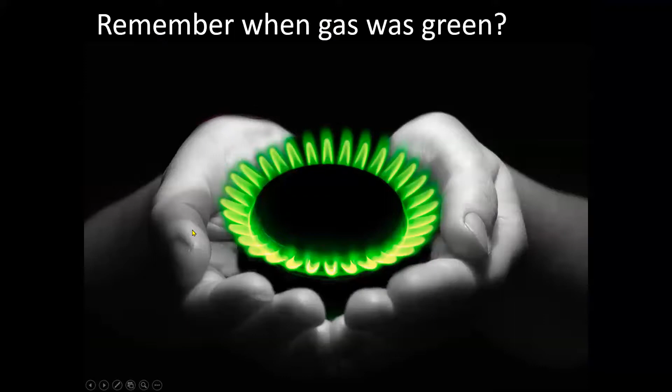All right, so let's get into it. So remember when gas was green and air cons were bad? That's pretty much how it started back in 2001 when I started Positive Footprints. And it was all down to the fact, well, air cons were bad because they were very energy inefficient then, high energy users.

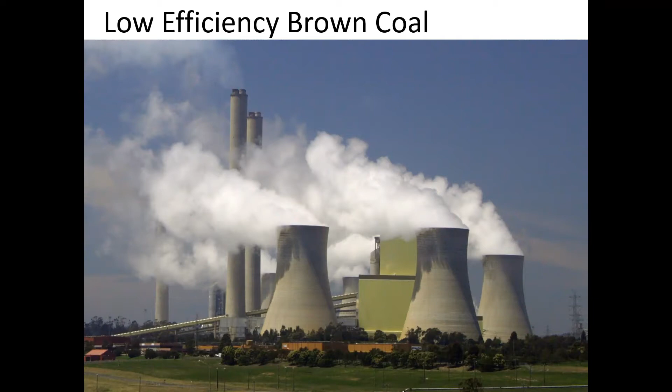But gas was good in the sense that it was better than coal. In Victoria, we have brown coal, which is worse than black coal. It's less energy dense, so you get less energy out of it in the first place. We also have the issue that it's in the Latrobe Valley primarily, and there's a long way to transmit the electricity, and you lose around about 70% of that electricity or thereabouts just getting it to your home. So it's very energy inefficient.

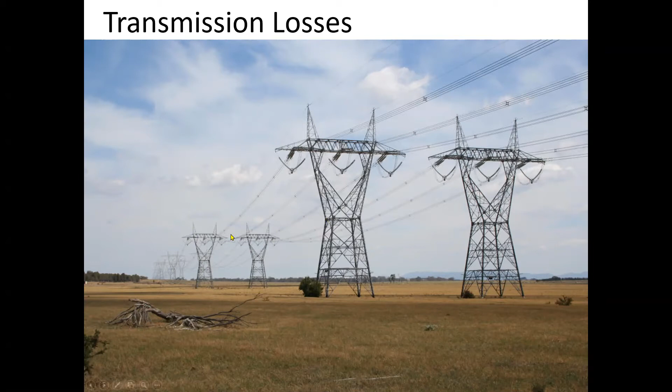And in Victoria, we have the dubious distinction of being the state with the highest carbon intensity for our homes, at 8.8 tonnes per year from the electricity and gas that we use. So electricity was bad, and of course hence gas was better. And the reason gas was better is because it didn't have the transmission losses. You brought it to your home and you burnt it at source.

And so we put it into our gas furnaces, our hydronic systems, our gas boosters for the solar hot water, gas cooktop, gas oven. If it could be gas, we'd pretty much make it gas. So what changed?

So what changed for me, first of all, was the sustainability of it with the idea of fugitive emissions. This came around, came to prominence around about 10 years ago. And it's simply the recognition that actually there are transmission losses in the gas network. And the transmission losses are not in the form of carbon dioxide, but in the form of methane. And methane is the main ingredient of the natural gas that we burn.

There's transmission losses all the way through the system, from when you drill down into the sedimentary rock to get at the gas, which can often come up at high pressure, and it's hard to maintain a complete seal. Then in processing the gas, then in bringing it through the pipes and all the joins in the pipes, getting it to your gas meter. Gas meters can leak - I've often gone past gas meters and smelt that gas smell. And then there's incomplete combustion within the home.

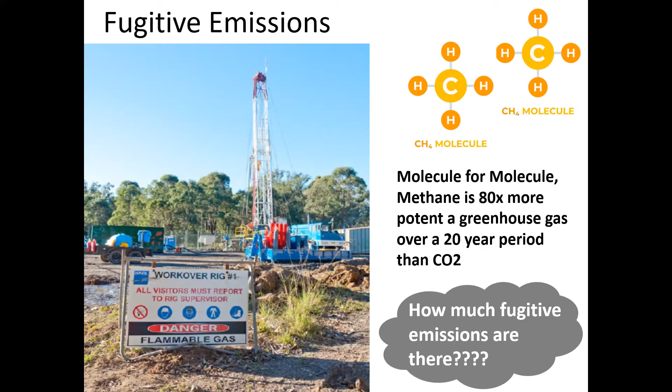Unconventional gas is now being pushed, and the reason that's being pushed is we sell a lot of gas overseas. In fact, we're the biggest exporter of gas in the world, second only to iron ore of our exports. So it's a huge industry, and we're actually now starting to run out of what they call conventional - that's easy supplies of gas.

Now we're looking at unconventional gas, which is more difficult to get. This one, coal seam gas, requires more drill heads to be put in - hundreds, potentially thousands over an area when they're getting the gas out. And to my mind, not only does that look like a more expensive way potentially to get gas, but also the opportunities for fugitive emissions probably will rise. Sounds logical.

At the same time as this idea of fugitive emissions making gas not so green came out, there's also a rise in gas prices, pretty much because we deregulated the gas industry and started selling overseas. Overseas there's a lot of demand, so the price for gas domestically competes with that demand, and the price goes up.

This is a really interesting little page here I found and wanted to show you. Of the gas exported, 72% of our gas gets exported, this big round ball here. But you look down, the gas we use in our homes is only 3%, and manufacturing is only 6.6%. So the vast majority goes overseas.

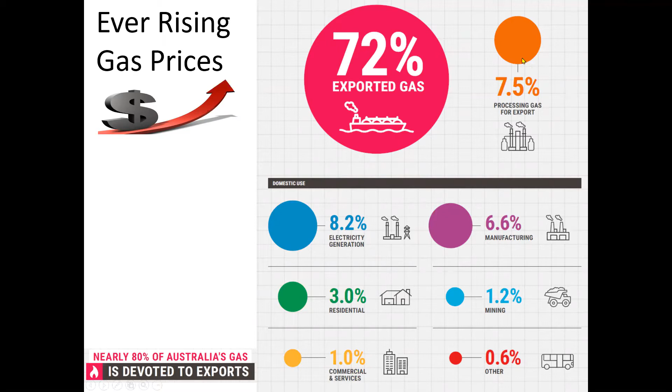It's a little bit sad for me that since 2005, we've started as a country putting in a lot of wind farms, solar farms, and a hell of a lot of rooftop solar, and I've been pushing that. The electricity grid has responded and become more green, in the order of about 15 million tons of carbon dioxide less intensive than it was in 2005. But that gain in carbon efficiency has been completely offset by the fact that we're now burning a whole lot of gas to send overseas.

So anyway, those are the issues with gas. At the same time, the technology has moved on, and air conditioners, which used to be the big bugbear of the sustainability movement—you wouldn't want to call yourself a sustainable builder and have air conditioners in your home—are now the darling, because they now have inverter technology and are much more efficient. In fact, they're so efficient they can be more than 100% efficient—200, 300, 400, 500, and the most efficient are 600% efficient.

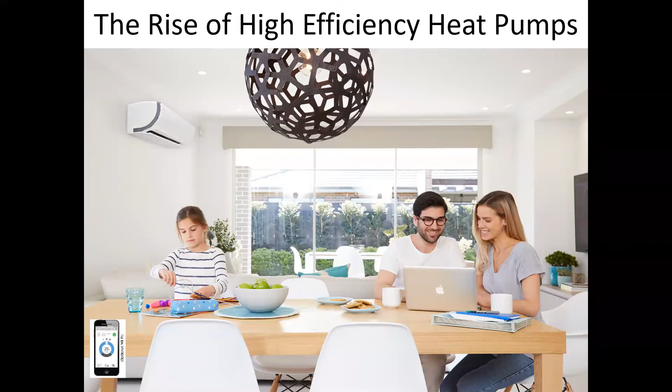What do I mean by that? I'll give you a little section of what an air conditioner looks like. There's different words for this—some people call them split systems, air conditioners, they're a type of heat pump. All of those words mean the same thing.

But the reason they can be so efficient: if you think about a gas burner trying to produce hot air for a home, the most efficient it can ever be is 100%. If all of the burning turns into heat, all that heat gets ducted into the house and none escapes out the ductwork, that's 100% efficient, because it's making heat. But these heat pumps aren't actually making heat.

They're just running a transport network from the outside to the inside around this sort of loop, running a refrigerant to do that. As they're running, the refrigerant gets very cold on the outside. In heating mode, it gets very cold, runs through these pipes, maybe minus 40. They blow air across it, and the air transfers heat into the refrigerant. Now that air might only be 5 degrees, but compared to minus 40, it's still very warm. The refrigerant goes up to the indoor unit, gets compressed, that heat comes out and goes into your room, and it just runs round and round.

In cooling mode, it runs the opposite way and grabs heat from the inside and shifts it outside. In doing that, a system like this might use, say, 1 kilowatt hour of energy to circulate. But in doing that 1 kilowatt hour of energy circulating, it might be able to transport 3 kilowatt hours of heat, or 4 kilowatt hours, or the best are up to 6 kilowatt hours of heat.

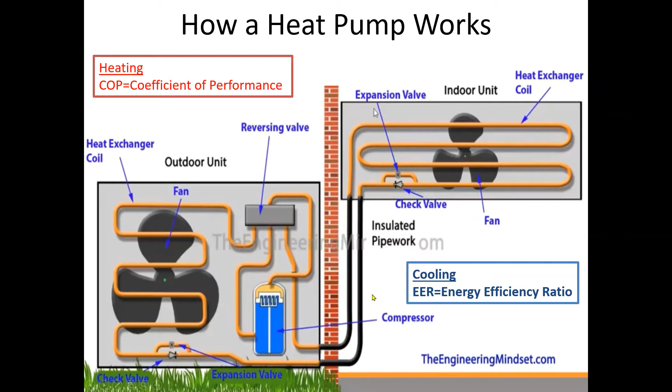It has a coefficient of performance of around 4.5, meaning for every kilowatt hour of energy you use, it shifts 4.5 kilowatt hours of heat into the tank. So heat pumps are sort of like the LEDs for the heating and cooling world, that sort of factor of improvement over what we had.

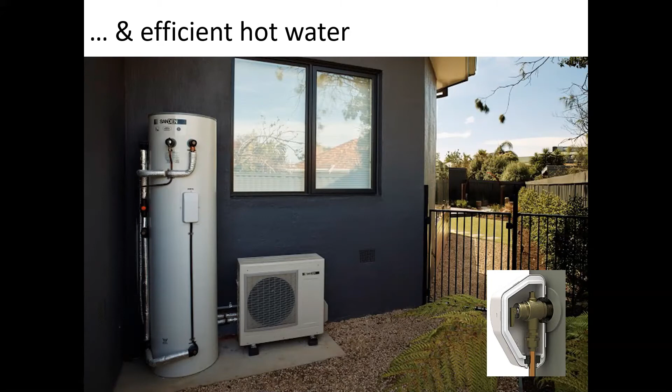At the same time, another piece of technology that works very well with going all electric is the fall in PV prices. My first PV system was a 1.5 kilowatt system back in 1998 when I lived in South Australia. It was 8,000 dollars after government rebate for 1.5 kilowatts. These days, well, here's one I just pulled off the internet, so you can get very, very cheap prices for large systems.

And what do you do with that energy? In the middle of the day, if you're all electric, you can put it into your hot water and heat the tank, or put it into heating up your home. And if you've insulated your home well, when the sun goes down you can turn it off and the house should maintain its heat well into the night.

Same in summer, you'll be making heaps of power, and you can use it to run those air conditioners. Again, once the sun goes down, turn it off and retain that coolness if your house has been designed well. We'll talk about retrofits in a minute.

So what sort of outcomes can you get? This is a house we built a few years ago. We've looked at the energy data. It's a new home, 8.1 star, so it's a well-designed house, I believe. It's got a 4.8 kilowatt system, and there are 3 adults living in this house. Most of the time they're working from home, and they average 0.6 kilowatt hours a day from the grid.

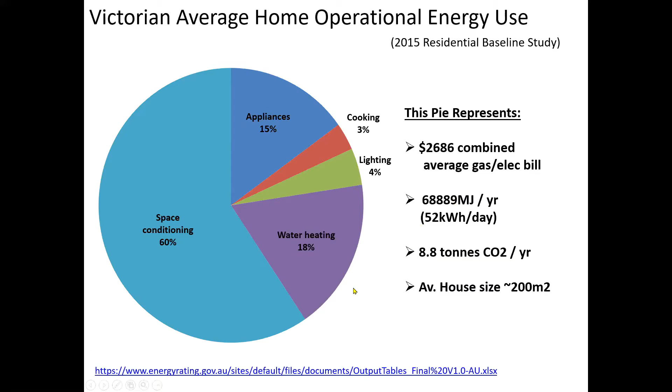So I've come up with this thing called a roadmap to carbon zero homes, and this is just a useful device to show where the big low-hanging fruit are to grab, and what the effect of implementing different strategies is on the improvement to the pie graph versus the average house.

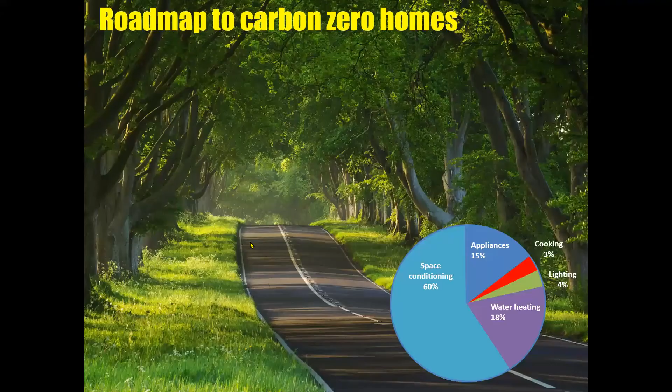So when you're looking at space conditioning, whether you're doing a new house, a renovation, or retrofit, there are three things that affect the performance or the amount of energy that goes into space conditioning.

One is house design. Obviously, in a retrofit, you don't have the benefit of mucking around with that too much. The next one is building to make sure that the house performs as it was designed to perform. And the last one is the energy efficiency of the heating and cooling that you put in.

So my first tip is, if you're doing a new home or renovation, what you should be doing is aiming for what they call a NatHERS rating, or a house energy rating of 7+. New homes have to have an energy rating, and the minimum is 6.

Just on that scale, a 0-star house would be like a tent. A 10-star house is a house that theoretically needs no mechanical heating and cooling. I would say don't go for the minimum, go a little bit higher, try to get to 7. It just makes it very easy to have a really good performance for the whole house as we try and minimize the wedges of those pies.

The other thing I would say is this little guy down here called TPA, Thermal Performance Assessor. This is someone who does the rating. I'd get them involved at the design stage, and this is what we do when we do our designs.

But 99% of the industry don't do it. They'll use it as a compliance tool just before you get the building permit. Unfortunately, at that stage, there's very little that a house energy rater can actually do to improve the design.

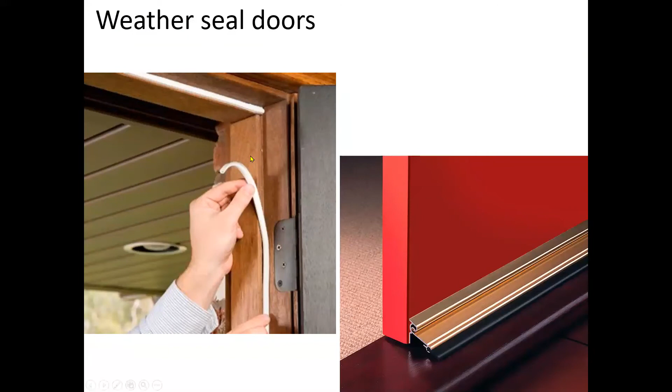A lot of homes have internal vents on the room walls. We no longer need those. They were put in back when gas heaters weren't flued to the outside, to stop methane poisoning from unburnt gas. These days heaters are flued to the outside, so on most homes you should be able to close those up and stop air leakage. If you're not sure, ask a builder or plumber first.

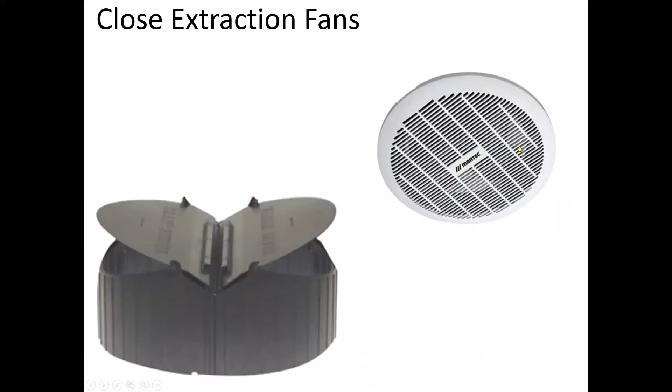Extraction fans are another thing to look out for, very common in bathrooms. They're just holes through to your roof, so in winter your hot air rises up to the colder attic space, and in summer you might get hot air coming down when you don't want it. Just put one of these over the top, and it closes off when not in use, then opens when the air's blowing.

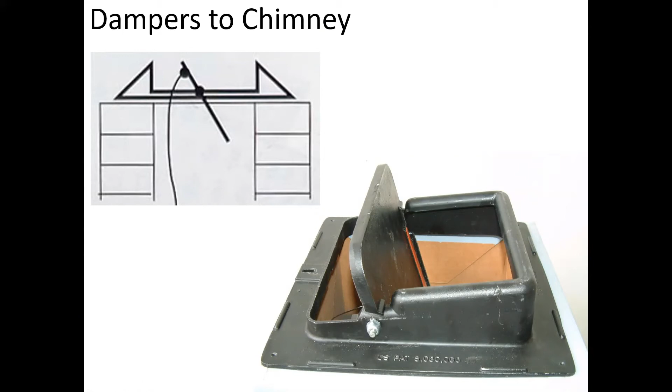And of course you've got chimneys. You can put dampers on, or seal up the throat of the chimney as well. It really depends on the house what you do, but the point is: find your gaps and cracks and seal those as a first instance, even before we talk about getting off gas.

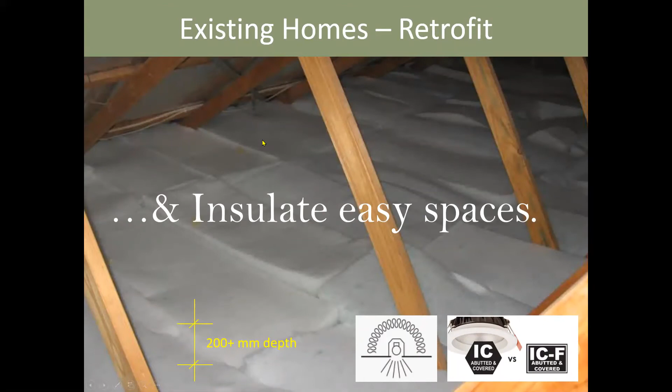The other thing to look at for an existing home is insulating easy spaces. You might not want to re-insulate your walls—that can be difficult—but ceilings definitely. Go up into your ceiling and measure the depth of insulation you've got. If you've got less than 200 millimeters of depth, I'd be putting another layer over the top. 200 mil is equivalent to an R3.5 batt, which would probably be my minimum recommendation.

One thing to note from a safety point of view: before you cover over like this, if you've got downlights going into your roof space, they can only be covered if the lights themselves are rated IC or ICF, abutted and covered, or have a symbol showing that. Otherwise, by law, the insulation needs to be pulled back so the light globes don't overheat and cause a fire in your roof space. So be sure you've got the right sort of downlights. If you have pendants hanging down instead, everything should be fine. And if you're building a new home, just try to avoid downlights to begin with.

You can insulate under the subfloor as well, as long as you've got enough height—400 millimeters really needed for someone to even consider going under there. It's not an easy task lying on your back putting on underfloor insulation rolls. Again, I'd suggest an R2.5 roll to go under there.

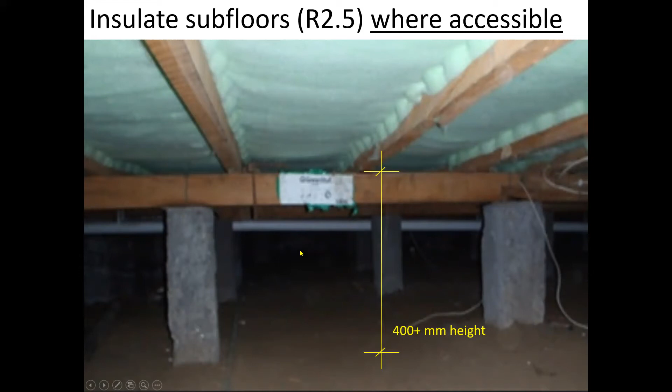Now, wall insulation—I think it's worthwhile doing, but I would only do it if your weatherboards or cladding are failing or rotting and need replacing, or as part of a renovation process. And when you're doing it, change over your windows at the same time, since it makes sense to do that together.

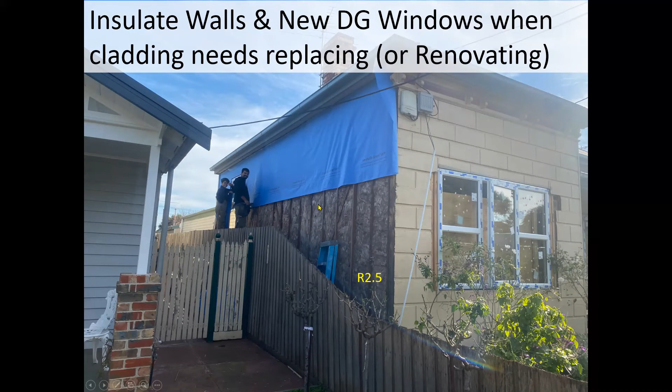Assuming you do some of those things, it's very unlikely as a retrofit you'll be able to do all of them. You might find your house has improved a little, you've made a bit of a dent, but it's probably not going to be at new house standard unless you're able to do a number of those items.

But don't despair, because you can still do a lot with technology these days. The next thing to look at, for an existing house, is to change over your heating system to an aircon system, now that you've insulated what you can and made your house reasonably tight, or at least got rid of the main offenders. If you're doing a new house, just use these from the beginning. I'd be specifying a coefficient of performance greater than 3—typically most of the ones we put in are 4+.

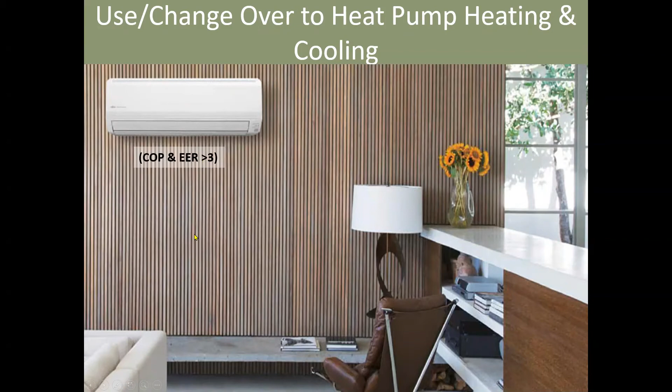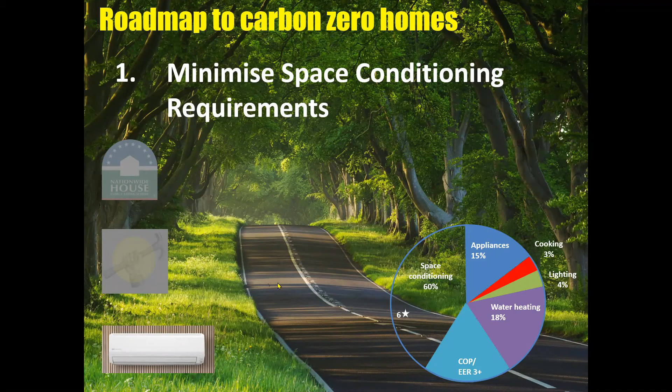If you've got a coefficient of performance of 3, effectively you can provide the heating and cooling you need with 1/3 of the power. So you made a significant cutout from the average house compared to what your house is now. And if you're building a new home, that wedge would probably already be smaller, because you would have already cut off more in the original design and construction.

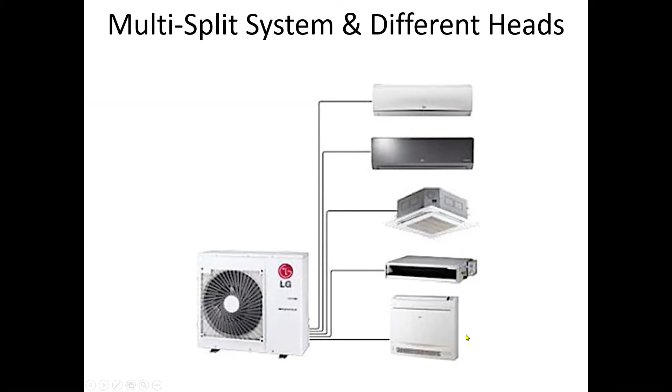Split systems can also come as multi-splits, where you've got one compressor to a number of heads. They don't have to be the ones up on the wall - they can be roof cassettes, they can be built into bulkheads so it just looks like a grill, more like a ducted system would look, or they can be radiator panels.

You can put them in as ducting through the roof, like more like a standard system. However, it will not be as energy efficient, just like any ducted system has reasonable inefficiencies because it's going through a cold roof space and you lose a lot of heat into your roof, even with insulated ductwork.

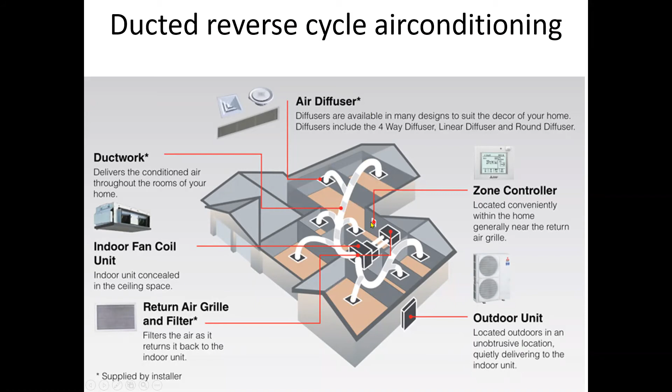So what do you look for when you're buying an air conditioner? The main thing you should be looking for is this COP, EER - energy efficiency ratio, coefficient of performance. I'm looking at this set here - that'd be the number for the indoor unit and the outdoor unit that goes on the outside. This one is the best on the market with a coefficient of performance of 5.81.

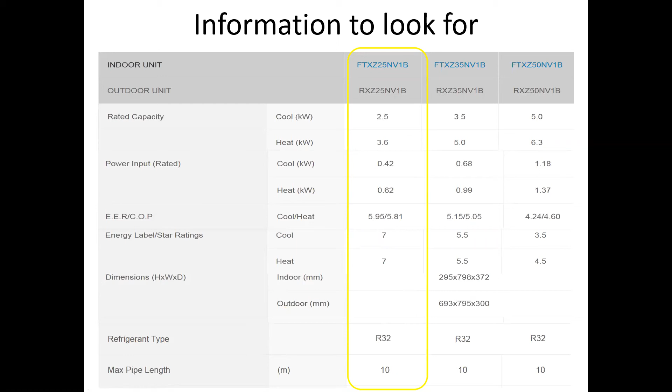That means for every kilowatt hour that I run it, I transfer 5.81 kilowatt hours of heat, or cool if it's in cooling mode - actually cooling is a bit better, it's 5.95 for cooling. The other thing that I think is really important to look at is the refrigerant type, R32 here. The reason that's important is those refrigerants are also greenhouse gases, and they're typically a lot worse than methane, than carbon dioxide.

Mostly what's on the market now is this R410A, so that could quite easily be 2 tons of carbon dioxide equivalent if you are just dumping your system or not decommissioning it properly. So old systems must be decommissioned. If you are changing over or getting rid of a reverse cycle air conditioner, you need to get a plumber in to decommission it properly and capture that gas.

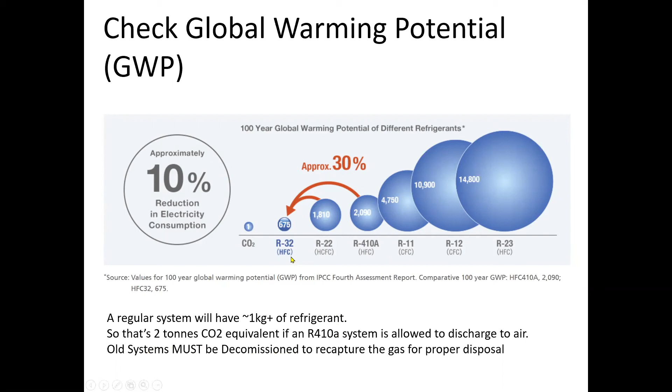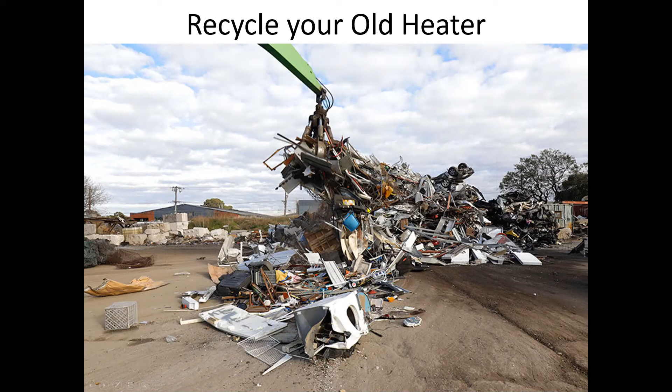And of course, if you're doing a retrofit, make sure you can recycle your old gas heater. It's mostly metal, so you can potentially get some money for it at a scrap dealer, or you can take it to a transfer station, or maybe even the council pickup service.

All right, so that's space conditioning and everything you need to know to make a big impact there. The next section to look at on this pie graph is water heating. Again, there are two factors: how water efficient are the hot water appliances in your house, which factors into how much hot water you need, and how efficient is the hot water system that you use?

So if we look at water efficiency first, the first thing to look at is your shower. Your shower uses half of the hot water in your house. This is really a dead set winner, and if you're retrofitting your house, I definitely do this straight away. Not only will it save water, but you'll start saving energy, and it'll be reflected in your bills from day one.

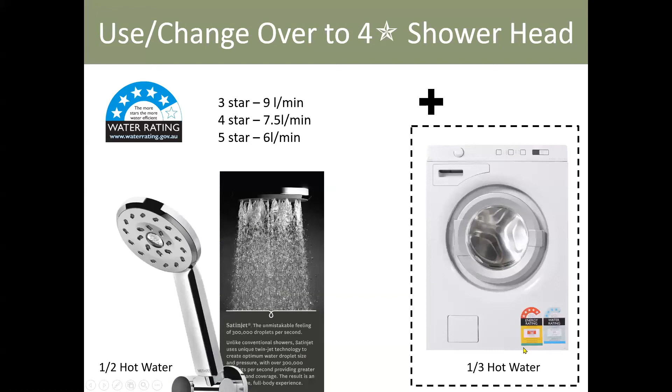The other appliance that uses a lot of your hot water is your washing machine. Because it's a more expensive item, I'd probably just change it over when you need to replace your washing machine. But for a new house, if you're getting all new appliances, go for one that's very energy efficient and water efficient as well.

So what sort of impact will it have? If you can go for a 4 star shower head instead of the standard 3 star, you save around 15% of that little wedge. If you go for a water efficient front loader washing machine with a few stars, you'll save a similar amount, a little less. Together, that's about a third of your hot water needs that you don't need anymore because you're more efficient at what you do.

The next bit of the wedge you can minimize by turning to heat pumps again. The Sanden that we use has a coefficient of 4.5. We set ours to daytime heat for two reasons: one, it's easier to get heat out of warmer air than cooler air, so the compressor works a little better. And also, if you put photovoltaics on your roof, you can set it to run during the daytime so you're using that solar power, like I mentioned before.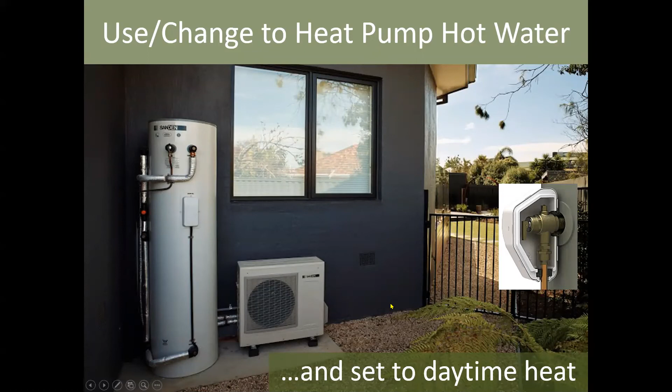Just as an aside, check the plumbing. Plumbers don't necessarily think about looks or energy efficiency. So once you've had a changeover, whether it's a retrofit or new build, check and caulk the penetrations so you don't get unwanted air going in and out of those.

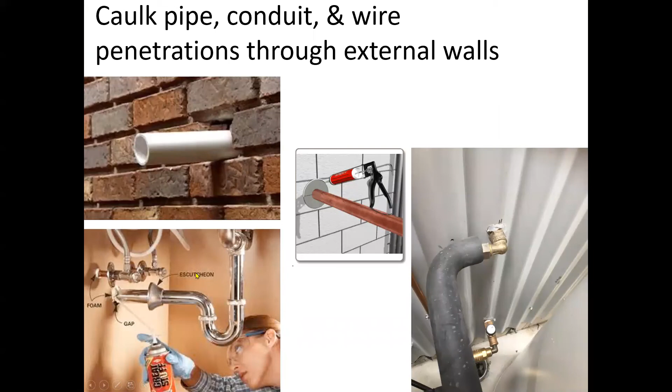If you put on a heat pump hot water system, typically with a COP of 3, you can provide that amount of hot water with about a third of the energy. With a COP of 4, it'll be a quarter of the energy, a bit less. You can straight away see we've made huge impacts already, and this can even be done with an existing home, on the energy usage in a house.

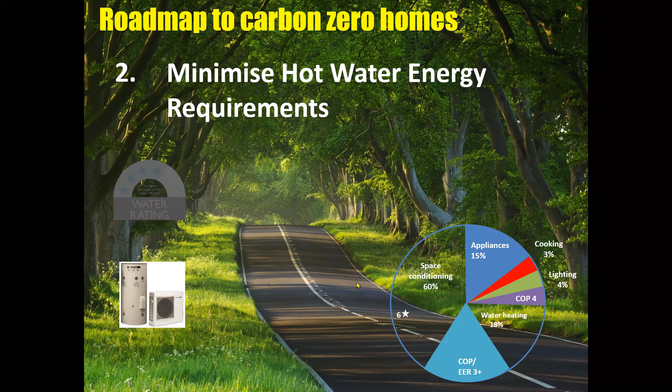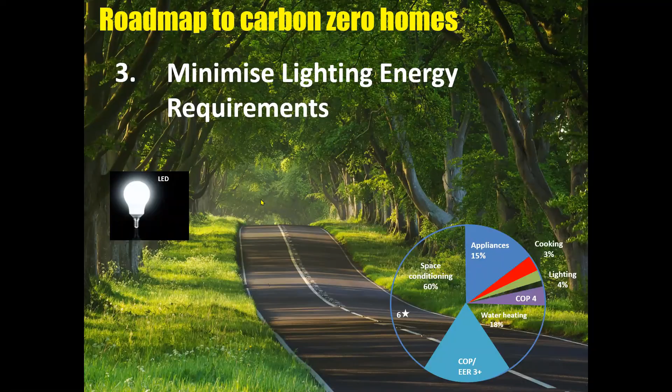For cooking, once you've been through this process, this is often the last appliance in the house that uses gas. It doesn't actually use all that much gas, it's only a small wedge. But the good thing is if you change to induction cooking, it's about 50% more efficient than a gas cooktop, because a lot of gas goes up around the sides of your pan. So it's more efficient to begin with.

But the real benefit is that if you don't have gas cooking, you probably don't need a gas meter, and that'll save you around $300 every year in connection fees. You can just get them to disconnect the gas meter completely. If you do that, you get a little bit of a benefit, but the real benefit is getting rid of the gas meter. If you must have your gas cooking, don't feel too bad, it was only a small amount, but it's an opportunity to save a fair bit of dollars.

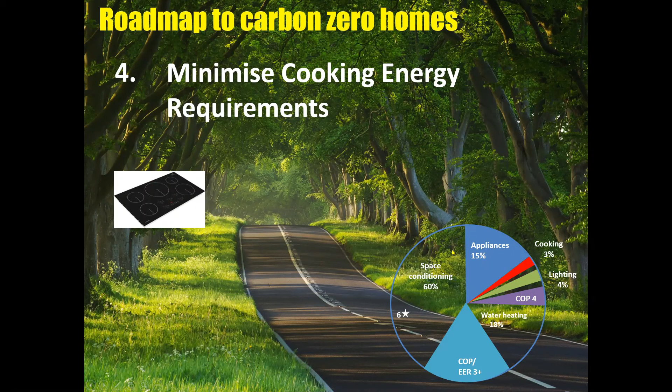The last section is really just to look at appliances. My rule of thumb is to change over to efficient appliances at the time when they break down. The only one I might treat differently is fridges. If you've got a very inefficient fridge, they use so much power that you might want to consider changing over sooner. They have different star ratings, to guide you: fridges, TVs, and dryers all go up to 10 stars, so bear that in mind when comparing models, whereas your dishwasher, washing machine, and aircon go up to 6 stars.

This is all just to confuse us, I'm sure.

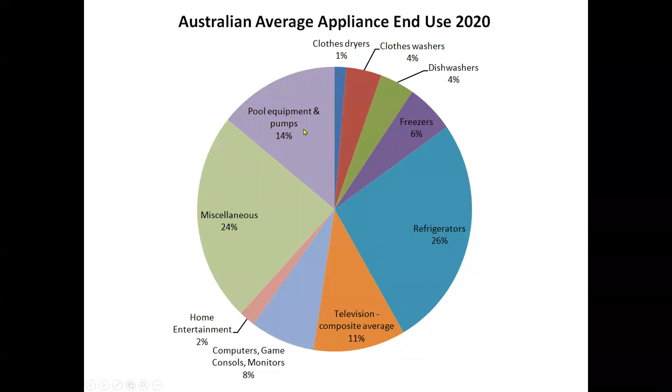But if you're choosing more efficient appliances, or doing a new house, over time you can expect a reasonable discount in your appliance use if you work through that list. This is just a breakdown of appliances, and it shows refrigerators are really one of the number one things to think about. TVs, those big TVs, can also use a lot of power, so that might be another one to focus on. If you do have a pool, pools can use a lot of power too, so make sure your pumps are as efficient as they can be.

All right, so we've really minimized this pie as much as we can. How am I going for time here? Okay, not too bad, I'm nearly there, Steph.

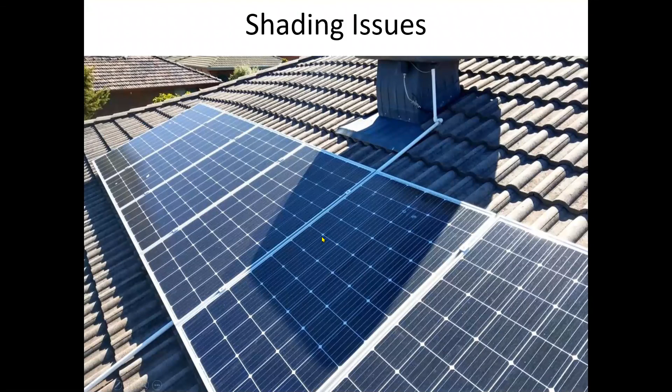A couple of things to consider if you're putting on photovoltaics is shading. A lot of the cheaper systems have the standard string inverter setup where all the panels are in series. When something's in series, if one panel goes down because it's shaded or producing less power, it will block the power from all the others in the same series down to its low level. So take shade into account and try to avoid it. If you can't avoid shade, instead of a standard string inverter, I would go for micro inverters, little ones that go on the back of each panel, so if one panel goes into shade, the others keep performing. There's another technology called a solar optimizer that does the same sort of thing, but ask the installer.

This is really important too: try to choose an inverter that comes with software so you can monitor it and find out where you're using the power. If your inverter doesn't have that, there are systems, like one called Solar Analytics, with a little clip-on meter that gives you the same reading back. This is super important because it tells you whether your panels are working or not — otherwise how would you know unless you're always checking your bills and correlating with the weather? Solar Analytics will actually send you an email if your panels aren't performing as expected on any day, and it's not uncommon for panels to stop performing, so you want to pick that up sooner rather than ten years later.

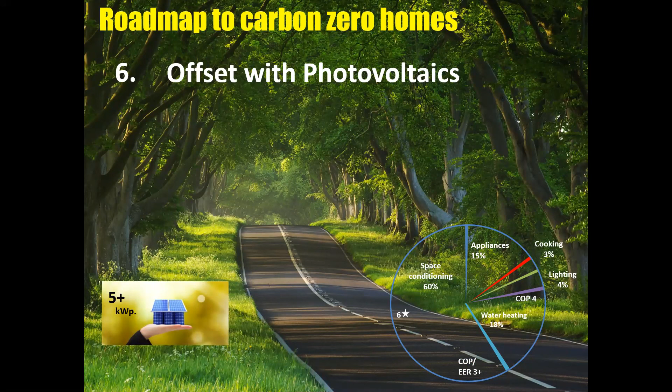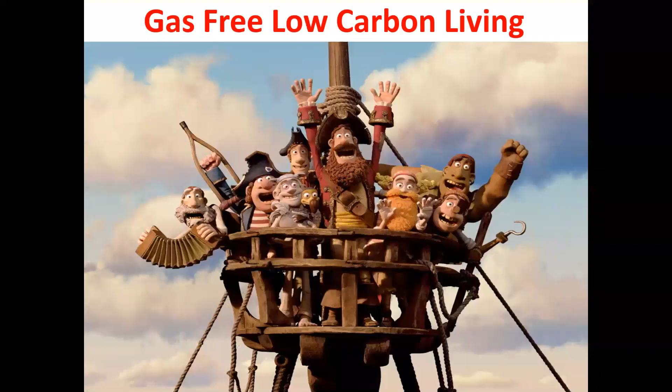If you offset with photovoltaics, from what I've found with clients, somewhere around 5 kilowatts of panel tends to be the point where you start producing as much power over the year as you use, which pretty much gets rid of all your loads. You'll still draw energy from the grid at nighttime when there's no sun, unless you get a battery system, but it won't be very much. So if you want to go that next step, make sure you're choosing green power when looking at energy providers — ask them if they have a green power program, which requires them to source the energy they supply from solar or wind farms. That effectively takes it all away, and congratulations, you are now at gas-free, low-carbon living.

That's pretty much it, Steph.